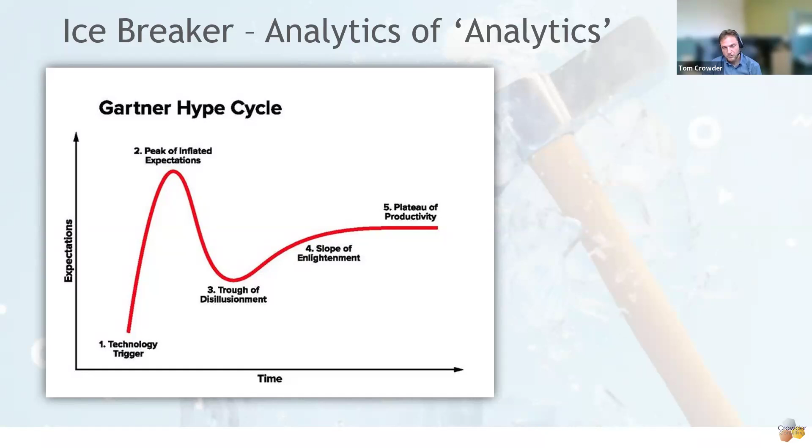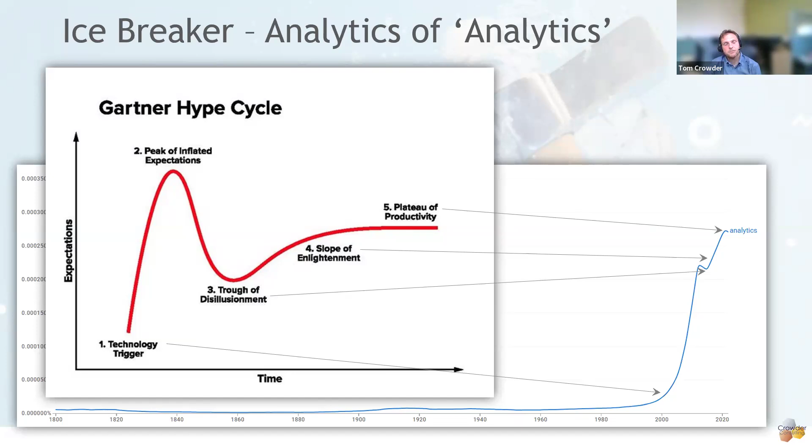So just to move on, the first section is about DMA flows and pressures. Really just to go back to what is a DMA and flow monitoring. This slide is really just showing what a DMA is.

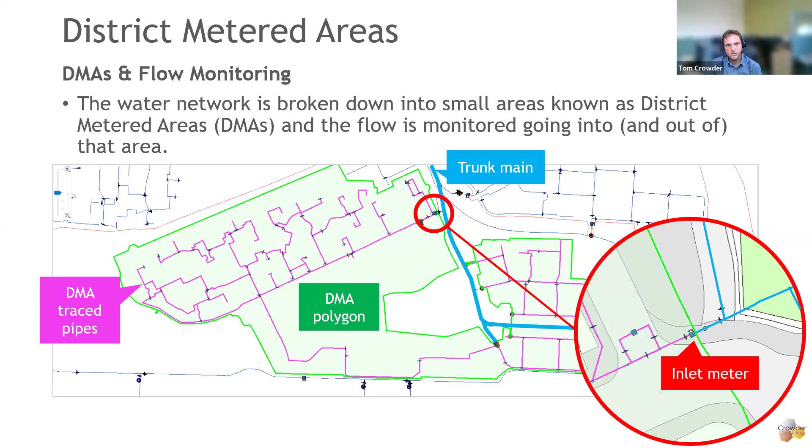The water network is broken down into small areas known as district metered areas, and the flow is monitored going into and sometimes out of that area. The net flow is the total flow for a DMA, and it's determined by subtracting the sum of the flow of all the outlets from the sum of the flow of all the inlets, which we're seeing here in green.

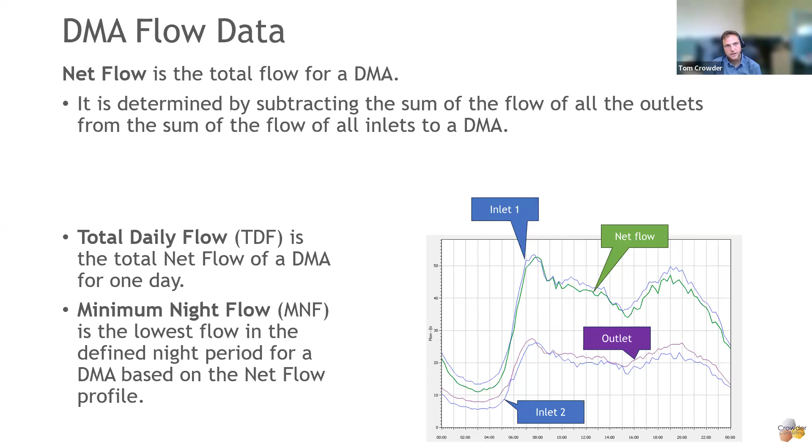And I always like the shape of the DMAs - we say it's a diurnal or predictable flow profile, and it looks a bit like your teeth. So we call it a sawtooth, like when you go to the dentist and get an X-ray.

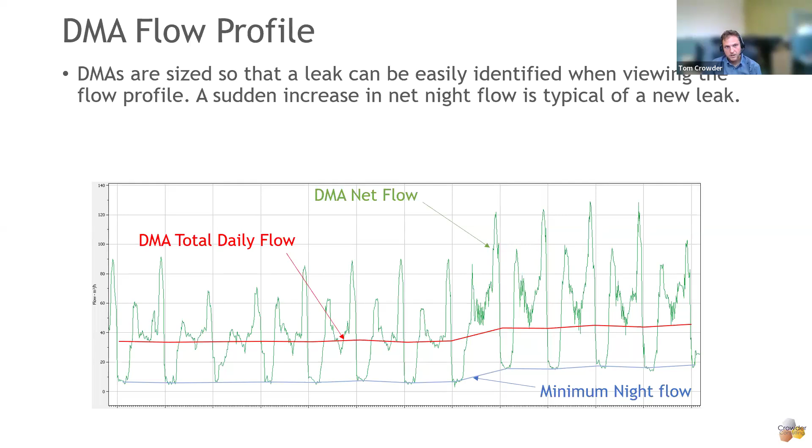When we're thinking about the minimum night flow, for leakage calculations and targeting, this is the most important period for a DMA. The reason for this is because it's the period of least consumption. In theory, for a residential area, the only consumption occurring during the night period is due to some people getting up and flushing toilets - which, yeah, I'm actually finding I'm doing more of, and I do think about that when I go to the toilet in the middle of the night. The flow measured in this period is called the minimum night flow period, also known as a DMA night line.

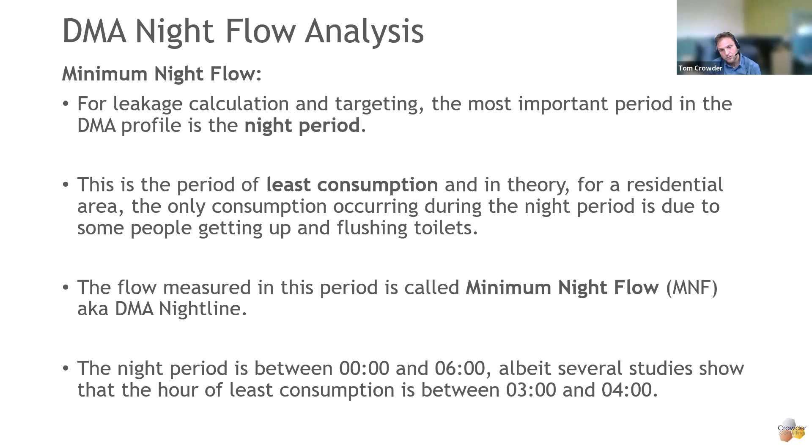We usually say that the night period is between midnight and 6, albeit several studies show that the hour of least consumption is between 3 and 4. But it obviously depends which country you live in, which region you live in.

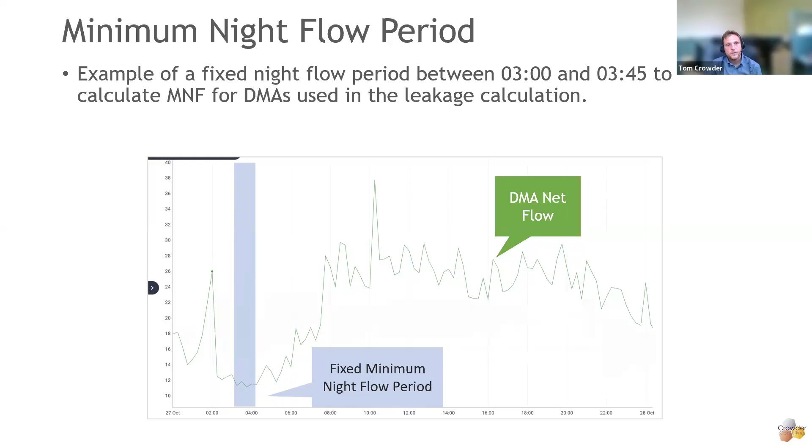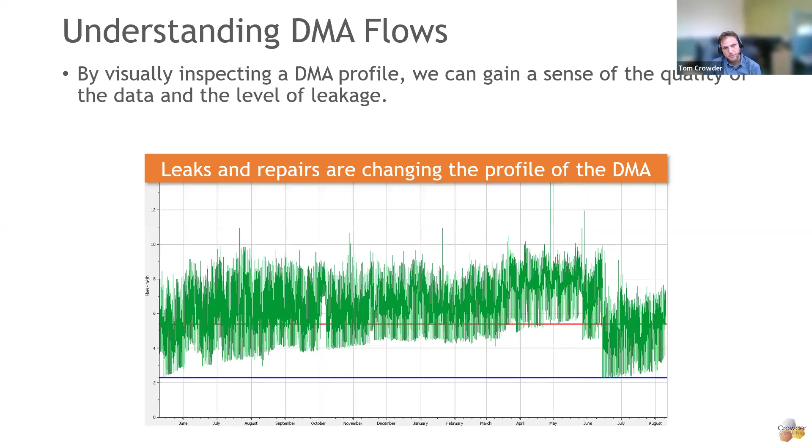When we come to understanding DMA flows, we can learn a lot just by visually inspecting them. Looking at this DMA, we can gain a sense of the quality of data and the level of leakage. We can see that leaks and repairs are changing its profile. Some leaks break out and are quickly repaired, which we'd refer to as reactive or reported leaks. And then we have some more long-standing leaks that have caused the DMA to go up, and they've been found over time after investigation.

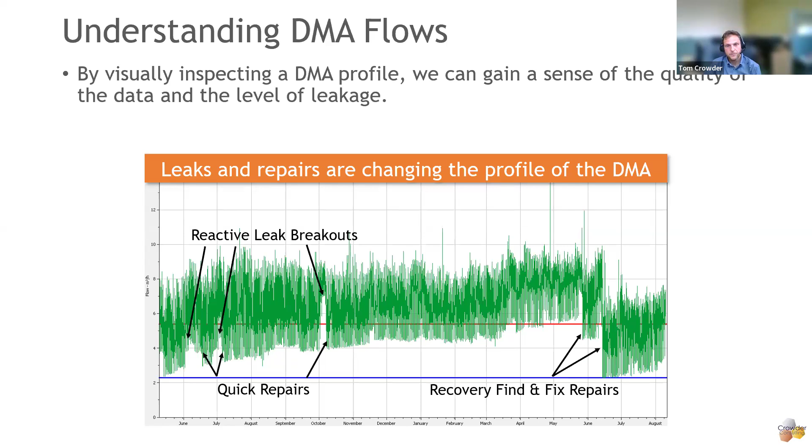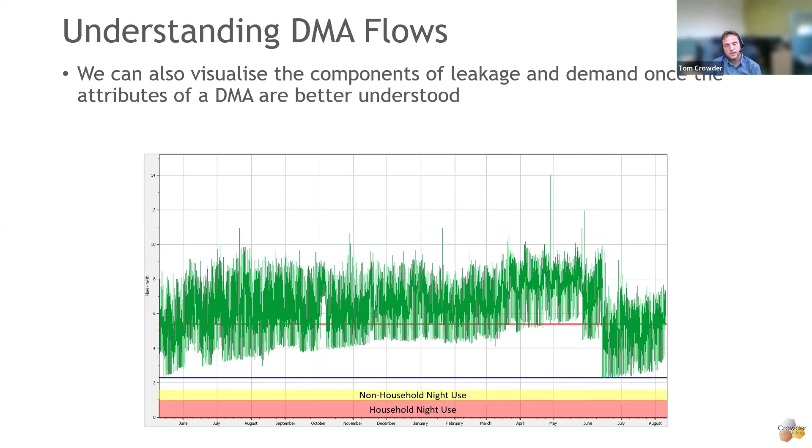We can also visualize the components of leakage and demand once the attributes of a DMA are better understood. If we understand the night use for households and non-households and the background leakage, we can then understand how much reported burst leakage and unreported burst leakage we've got. So it's important when looking at a DMA graph to try to visualize that it has several components that it's made up of.

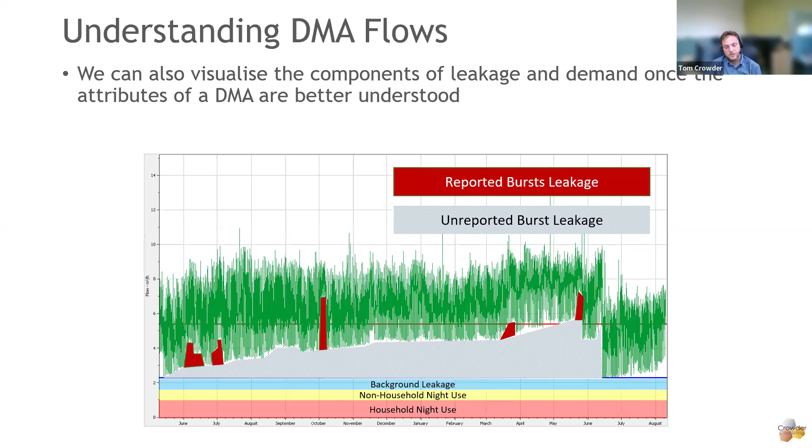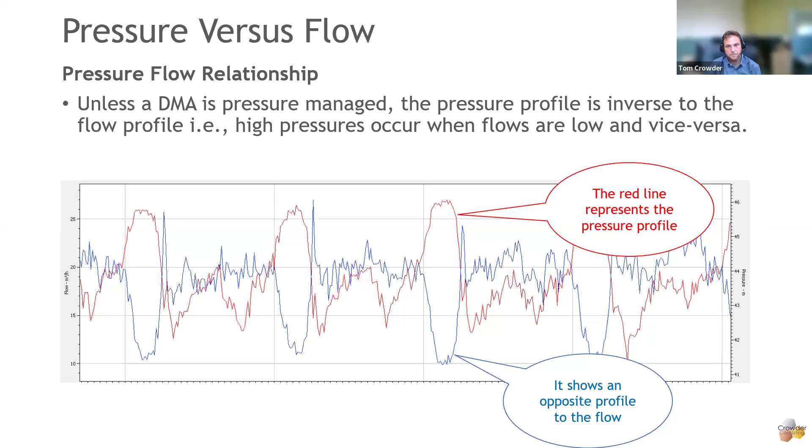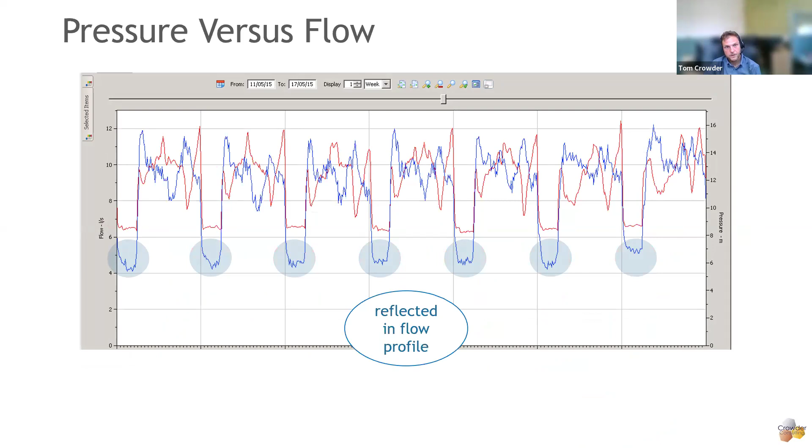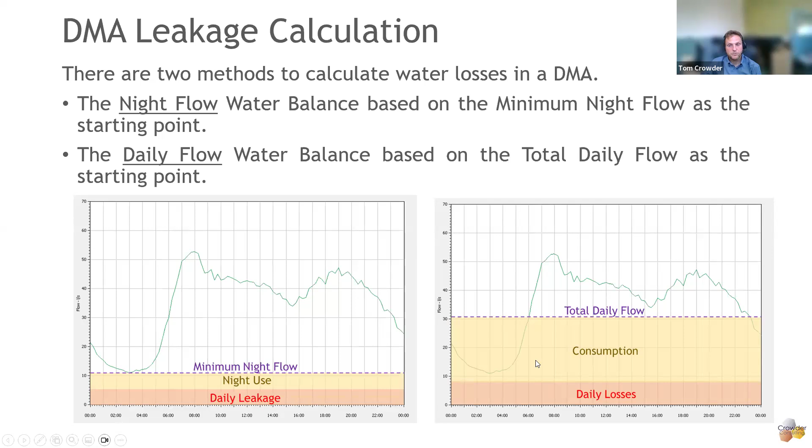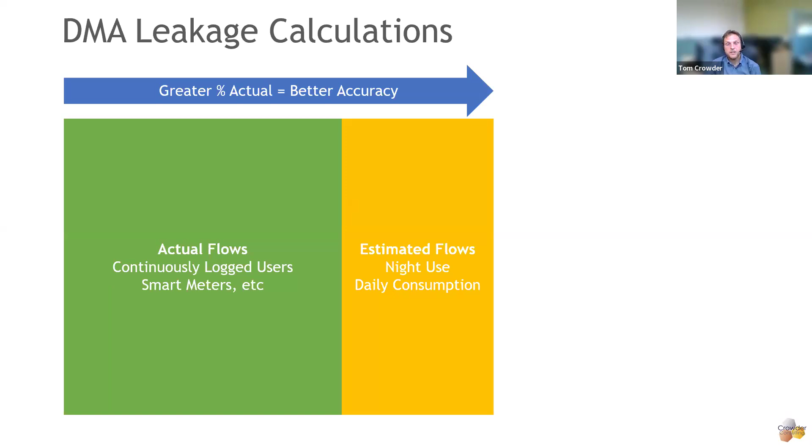So the more this green box goes to the right, the more accurate our leakage calculation will be. Similarly, with the orange box on the right, the greater that percent is measured, the higher confidence we have. So the more of your flow that is measured will increase your confidence. But that is caveated by whether you've got a good night use model and how frequently you read your meters.

Here in the UK, for measured households, for example, we may only read the meters every 6 months. So when you're trying to work out the flow consumption for a household for an individual day, and you've only got readings every 6 months, it's quite difficult to do. But the more frequent your readings, the more you can predict your daily consumption and then what your night use would be.

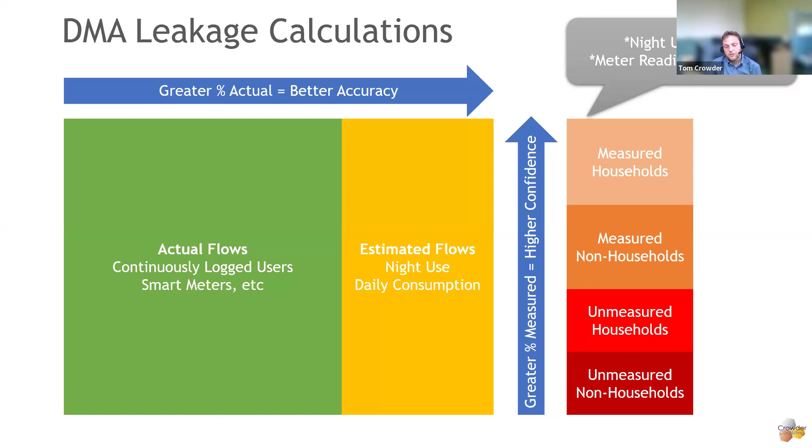So when we get into the night flow water balance, we use it to calculate leakage in DMAs with a valid minimum night flow and reliable night use allowances. You've really got to have those two things as a starting point.

When we do the calculation, night leakage is derived by subtracting your actual night flow—your continuously logged night flow, any smart metered night flow—and your estimated night use, so your household night use, non-household night use, and any miscellaneous night use. What you're left with is your night flow leakage, which you multiply by a night-day factor.

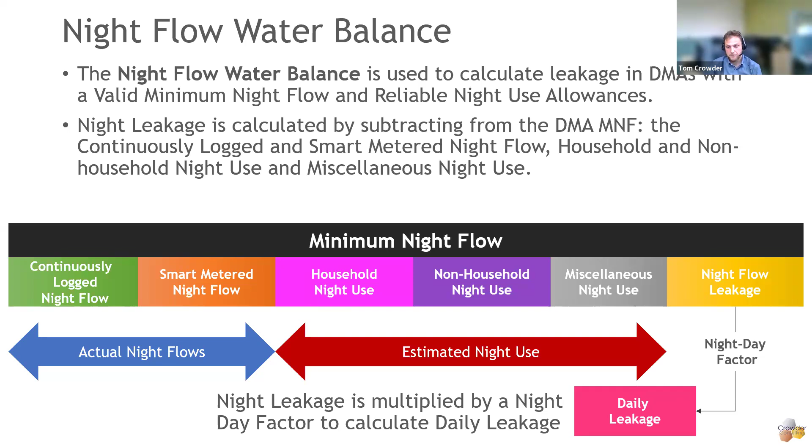To give you your daily leakage for a DMA. When we think about the night-day factor and the AZP and pressure and leakage, we've got a little diagram to illustrate. Imagine this is a topographical diagram of a DMA. We've got our inlet meter, our critical pressure point, our average zone point, and a boundary valve. We've got our flow measurement and our pressure at our AZP.

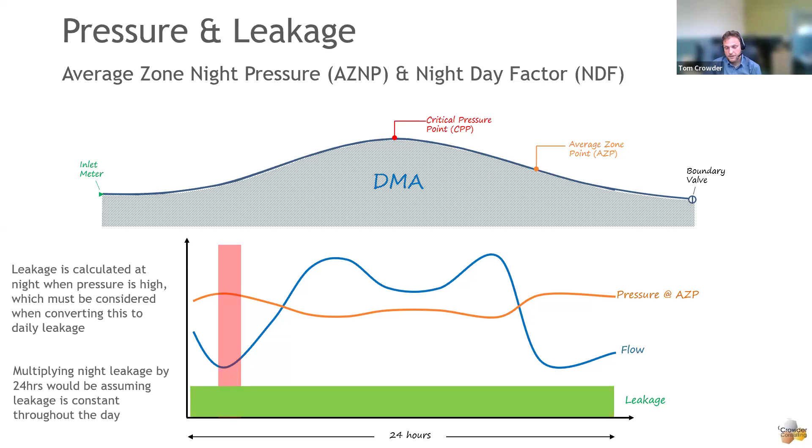We know that our leakage will vary throughout the day according to the pressure. If we're calculating our leakage at night when pressure is high, unless it's pressure managed, we must consider this when converting the night leakage to daily leakage. If we just multiply by 24 hours, we would be assuming that leakage is constant throughout the day. So we have to adjust the leakage by a night-day factor, which uses the ratio between night pressure and average daily pressure to adjust the leakage, as illustrated here.

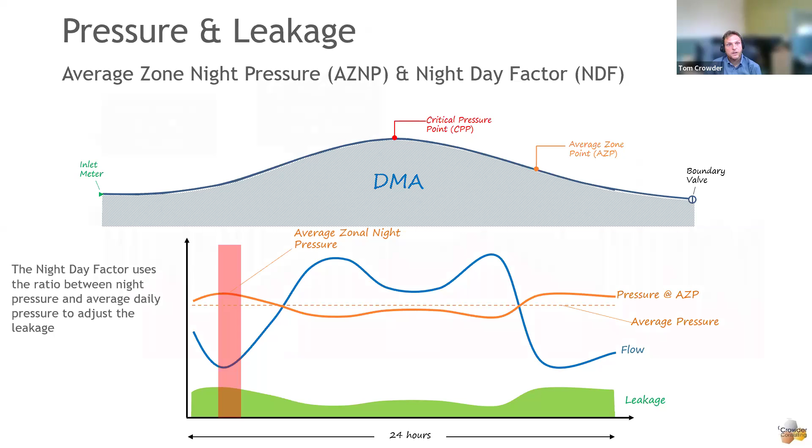Now, when it comes to trending leakage, this is showing a night flow trend for a DMA, and we can see the flow rate in litres per second. We've plotted 52 weeks in this trend of the night flow for a DMA, and we can see the different components of the night flow over time.

In the chart, we've got our leakage, which is the biggest bit in this DMA, the red bit. We've got our night use, our continuously logged flow, and then the line along the top is our minimum night flow. These are weekly trends.

Just looking at that trend, because this is the UK and we were talking about the weather before, we always have a cold period in the UK. You can see how this cold period is influencing the leakage, making it go up. And we also have a warm period, which also bizarrely always makes the leakage go up.

This is a common argument here: is it really leakage, or is it demand? And it is both. I think leakage goes up because of demand and we're not accounting for it properly. But also, when we do have extended periods of hot weather, it does actually cause more breakouts on our networks as well. So it's just interesting to see those trends of leakage over time.

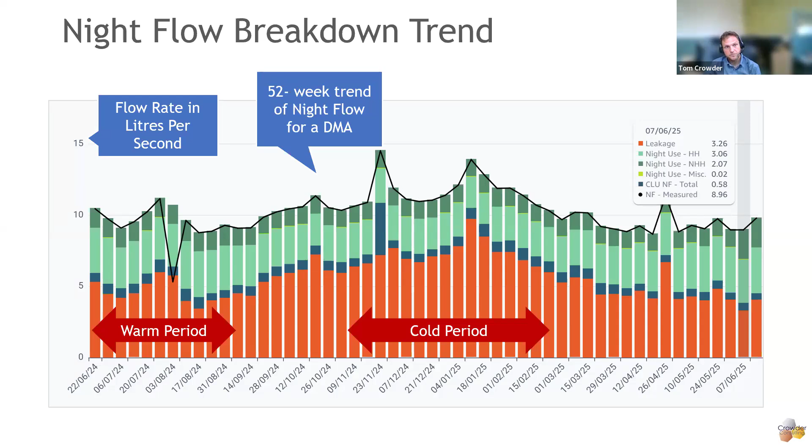When we look at the daily leakage trend for that same DMA over that same time period, we can see the flow rate in megalitres per day. We've got the trend of leakage. What is good to do is look at rolling trends, where you're not just looking at a fixed value each week, but looking back over a longer period to see if your leakage is generally trending up, trending down, or staying about the right level.

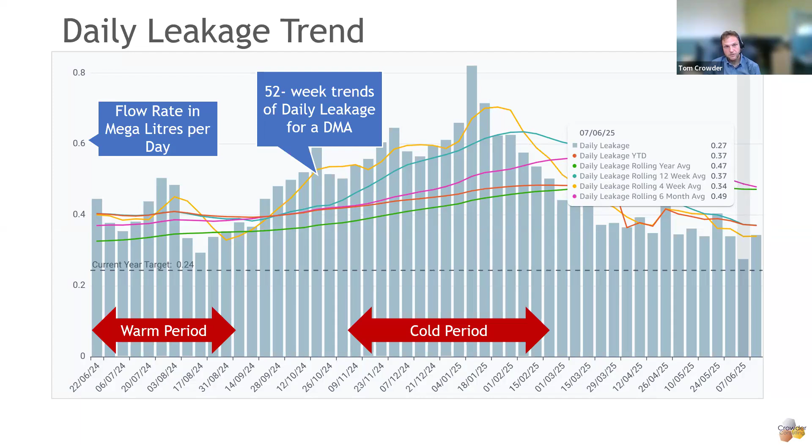Again, we can see that same cold period where leakage jumps up. Usually in the UK, that's panic—that's when they press the red button and everyone really gets onto it to resolve the leakage. And then we can see that same warm period where leakage has gone up too. So they're just some simple trends of leakage that we can do over time.

The daily flow water balance can also be used to calculate leakage in DMAs. What we generally say is you would use a daily flow water balance where you've got an irregular minimum night flow or unreliable night use allowances.

Similar to the night flow water balance, you've got your actual daily flows that you're subtracting from your total daily flow—so continuously logged and smart metered. And then you've also got your estimated daily consumptions. I say estimated, it could be all measured, but on any given day, if you haven't got readings for that particular day, there's always some level of estimation in terms of what the consumption is. And then the difference we have is daily losses.

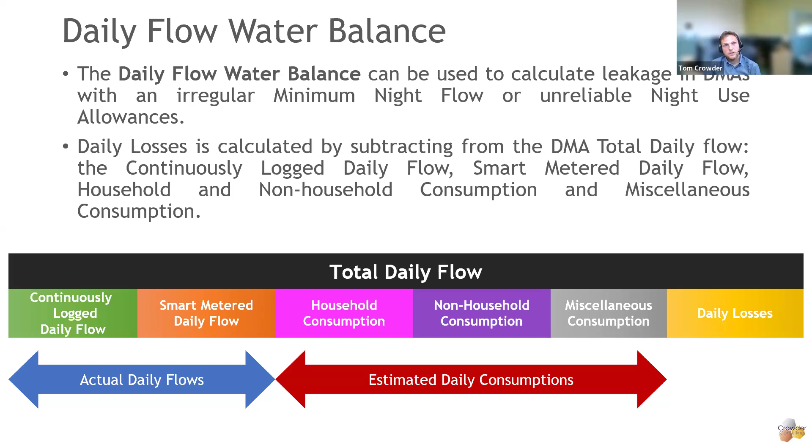Now, what we can do with that calculation is compare what we're getting from the daily flow water balance with what we're getting from the night flow water balance, and compare those two values of leakage. This is considered good practice because it can help identify potential data issues or integrity concerns within your DMA. We call this difference a residual difference.

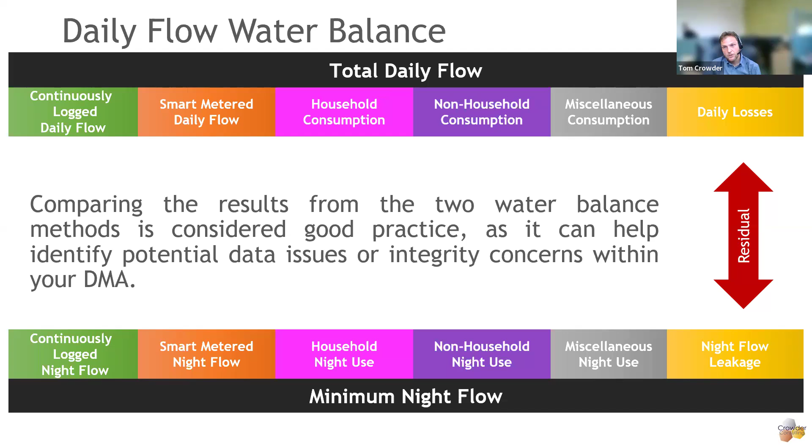It also, if we swap some terminologies around, can tell you how much potential apparent losses you've got, if you're confident in both sets of calculations—one is more equivalent to your non-revenue water and one is more equivalent to your real losses. It gives you some valuable insight as to the level of real and apparent losses within a DMA.

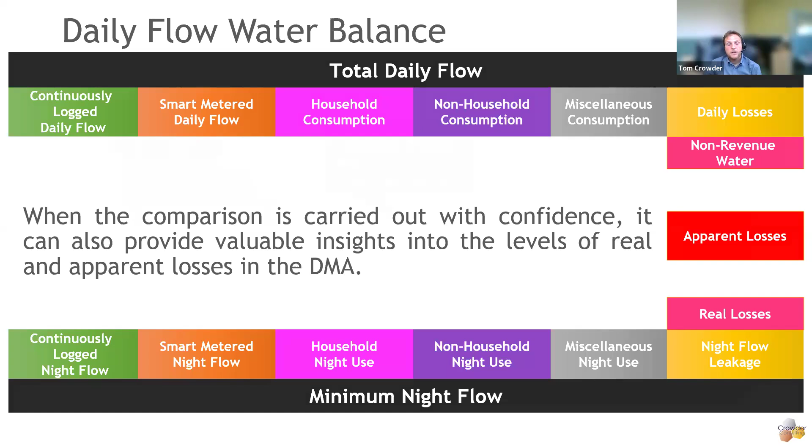Next, I'm going to talk about the DMA mass balance. When we think about the mass balance, this is where we're putting the net flow alongside the components of demand, including consumption and leakage. When we're thinking about the residual, here the residual is the difference between the DMA net flow and demand, but we're looking at the residual as a 15-minute profile rather than a daily or weekly trend.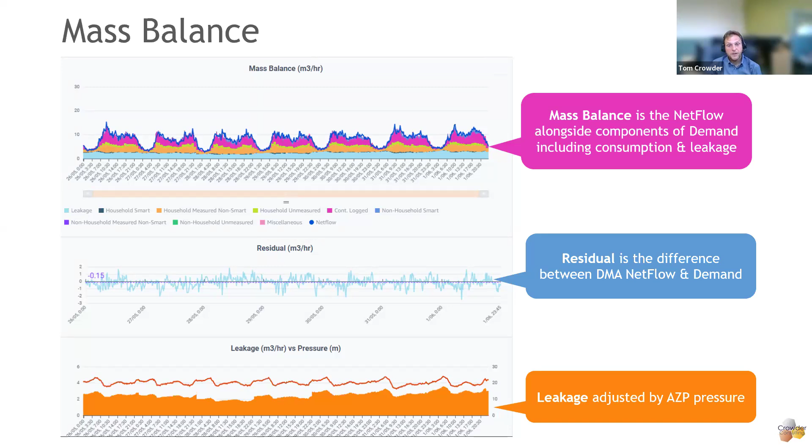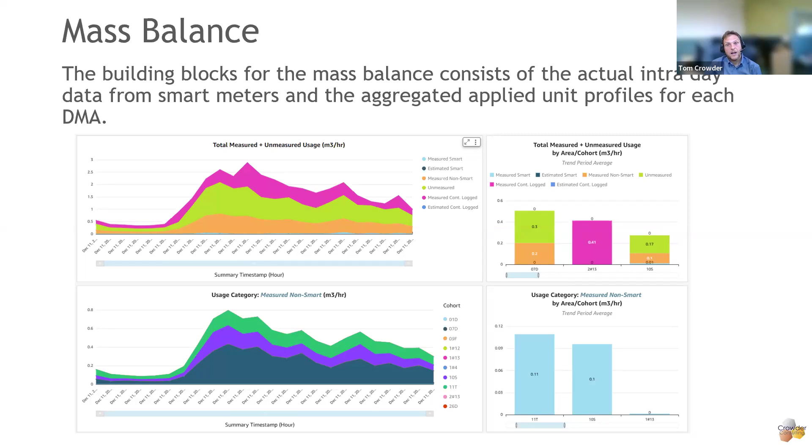So the building blocks for the mass balance consist of the actual intraday data from smart meters and the aggregated applied unit profiles for each DMA. In other words, we've got our smart meter data, which we know, and we can use that. But then we use that smart meter data to adjust the data that isn't smart metered to make it more accurate. The way we do that is we generate profiles from the smart meters, and then apply them to the consumption of each non-smart property.

So we're looking at a household as an example. This could be a profile for a particular type of household generated on any given day from the smart meters. What you'll see is that when you average this profile out, it will equal 1. Then we apply that profile to individual households, to their individual consumptions, and that's how we can get a profile of what a household that isn't smart metered could look like.

It's the same type of analysis that we do for non-households, where we have a profile for groups of non-households - for example, agriculture, or hospitals, or other groups. The average will always be 1, and then we apply that unit profile to the individual non-households that aren't smart metered to get an idea of what they may be using throughout the day.

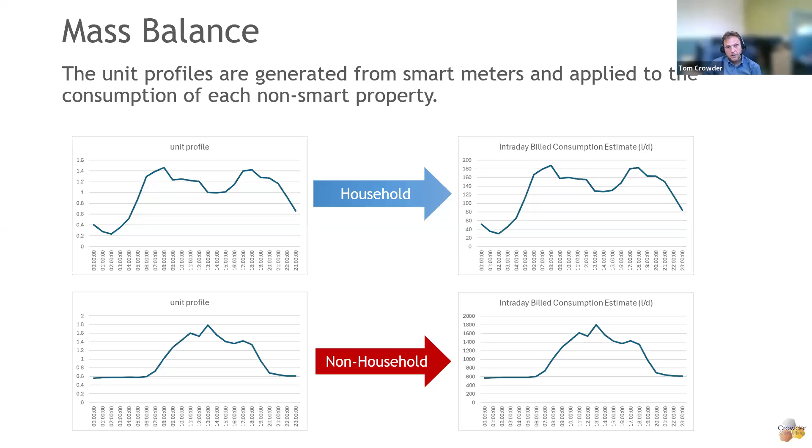When we get to leakage, we still calculate leakage in the night period using a similar type of calculation to what I was showing, but we adjust the leakage by the AZP profile. This is where we use the average leakage and the average pressure at 3 and 4 a.m., multiplied by the average zone pressure at any given time. This is really just giving you an example of how you do that.

What we end up with then is when we're looking at a single day, the leakage will follow the trend of the pressure. When we're looking at a 7-day view, we can also see how the leakage trends against the pressure. So it just brings the leakage more to life when we're looking at it for a particular DMA.

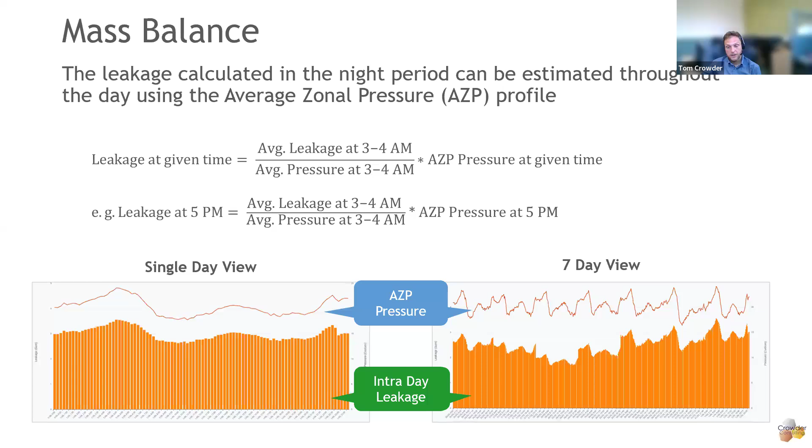This is an example of a DMA with almost full smart meter coverage - it's got 93.64% smart meter coverage. What we can see is if we look at this top section here, there's a bit of a gap, and that gap is reflected here in this residual profile.

This shape and this magnitude tells us something a bit more about what might be happening in the DMA. It indicates that we are missing some consumption potentially in this DMA, because it's quite a regular shape and it's usually always positive. So it helps to investigate specific issues within the DMA. And then we can see our leakage there against the pressure, which is a little bit up and down as well. So it's just to give you a bit of insight about the mass balance and how it can be used in bringing leakage to life, as it were.

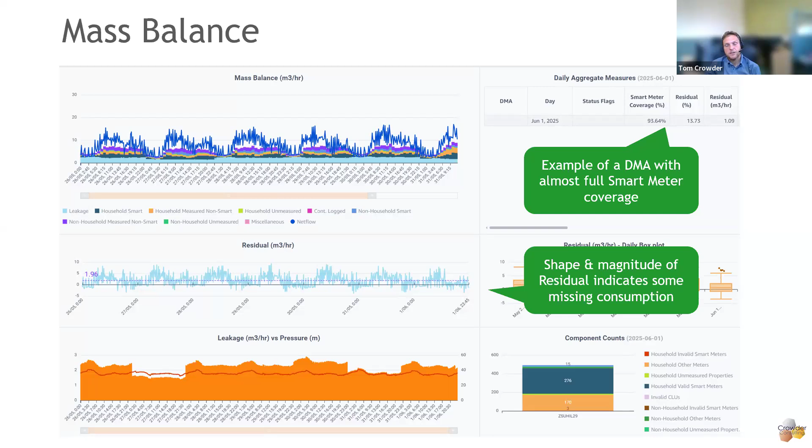So next is a case study.

This case study is based on work we were doing with Northumbrian Water in Berwick upon Tweed, which is the northernmost town in England. It's almost in Scotland, you can see Edinburgh there, and there's Berwick. For football fans, it's the only English team to play in the Scottish League.

Berwick is an independent water resource zone in Northumbrian Water, meaning this area doesn't have any links with other areas. It's got its own water treatment works that supply it, with no transfers in or out. Some would say that's good, but it's kind of bad because it makes the water resource zone less resilient and more susceptible when there are high levels of demand, like during a heat wave, when up north we go a bit mad filling things in our gardens and use a lot of water.

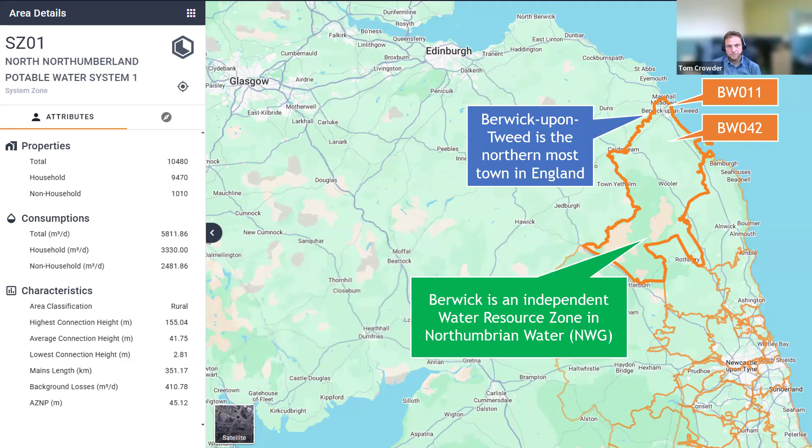Reducing leakage in the Berwick zone to the target level was a key water resource management objective for Northumbrian Water, and it was successfully achieved in March 2025.

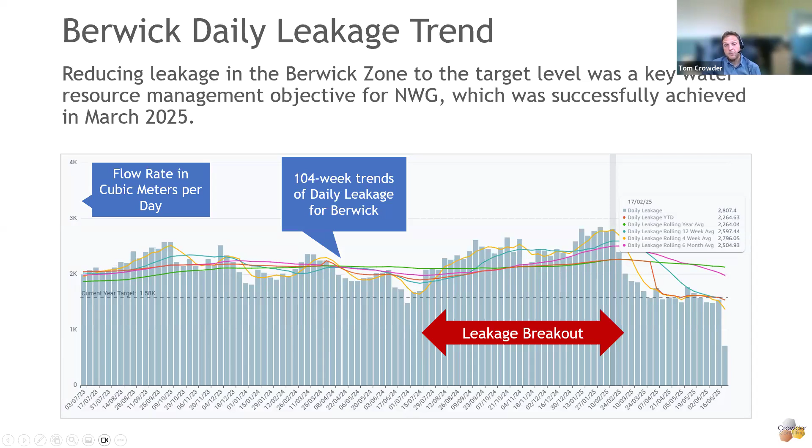This trend shows the leakage for the entire zone in cubic meters per day, trended over 104 weeks, essentially 2 years, so you can see how leakage is changing over time. In 2024, there was a particular issue with a leakage breakout, which was a big headache for Northumbrian Water to solve.

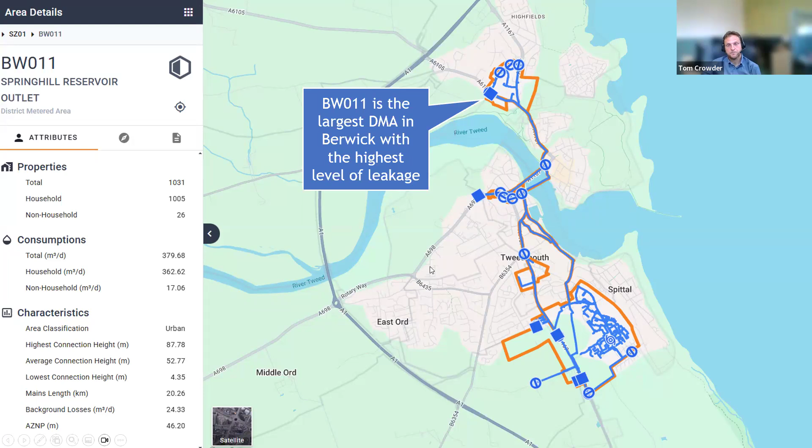Reducing leakage in BW011 was critical to meeting the zone's overall leakage target, as it accounted for 32% of total losses. You can see again the flow rate in cubic meters per day.

Looking at the flows and pressures for BW011, it's a bit of a nasty DMA. It had 1 inlet meter and 6 outlet meters, but its net flow lacked a typical diurnal pattern. Here we've got the inlet flow, which is nice, and the AZP pressure, which is doing the opposite of the inlet flow. But the net flow is a bit up and down, and doesn't have that nice diurnal pattern you would expect.

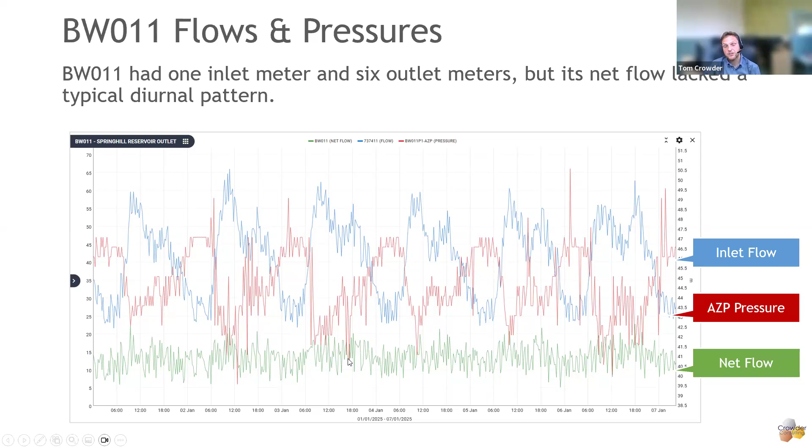We wanted to understand that a bit more, so we installed an ultrasonic meter in line with the inlet meter. What we found is that while the daily average flow remained largely unchanged, variations were observed at 15-minute intervals, particularly during the night flow period. You can see these little spikes during the night, and that's obviously affecting our leakage calculation. But overall, the difference up and down wasn't that far off as an average flow, just these individual 15-minute periods.

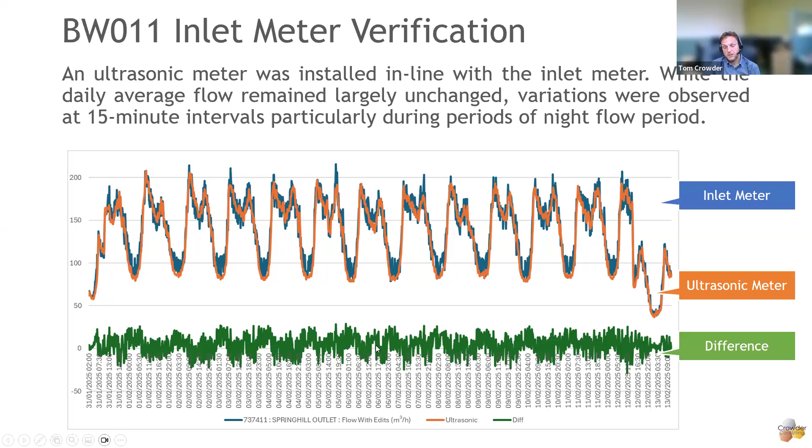Although the inlet meter had known issues, we still remained confident that the DMA was experiencing significant leakage based on historical trends and the daily flow water balance. We estimated the leakage to be in the region of 7.5 litres per second, or 0.65 megalitres per day.

As mentioned, the DMA proved challenging to survey, and Northumbrian Water had already employed both conventional and innovative techniques, but hadn't got to the bottom of the leakage. So therefore, in collaboration with Northumbrian Water, we recognised a need for a different approach.

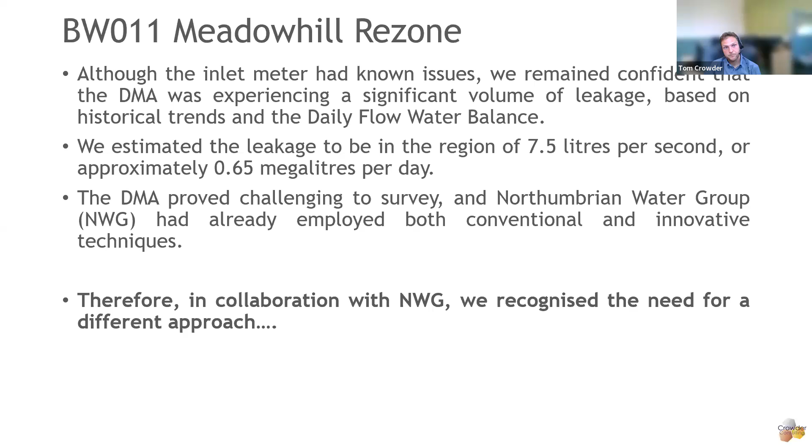What we devised was to rezone this DMA, BW011. We were going to feed the north section from another DMA, and then feed the south section too from another DMA, and just leave what we felt were the nasty bits of this DMA, the trunk main system. That would essentially be about 5 kilometres of mains and 188 properties.

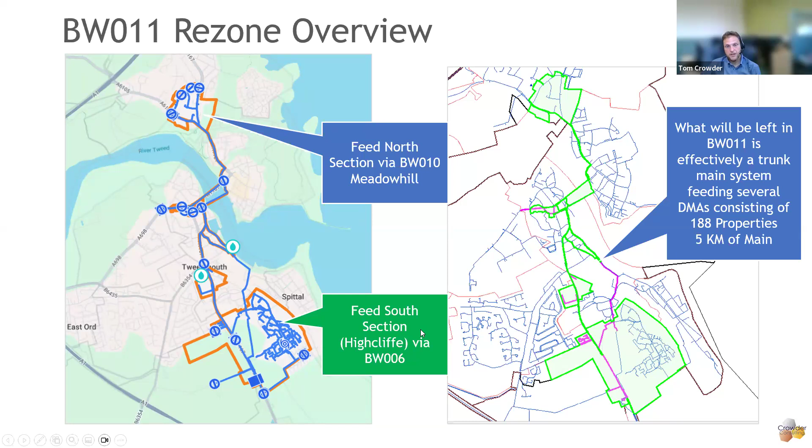So the first bit that I'm going to go through is this green bit here, which is the rezone of the south section.

When we devised this rezone, we wanted it to be a permanent rezone because we wanted to increase the size of BW006, which was a small DMA, and make the most use of its inlet meter, which looked good and reliable, to feed the area in BW011 that had the most properties, Highcliffe. So you can see we want to feed this section here from BW006. We'd also end up feeding another DMA from BW006, and that's what BW006 is currently.

And then we devised a series of steps to do that rezone, which was carried out during the night.

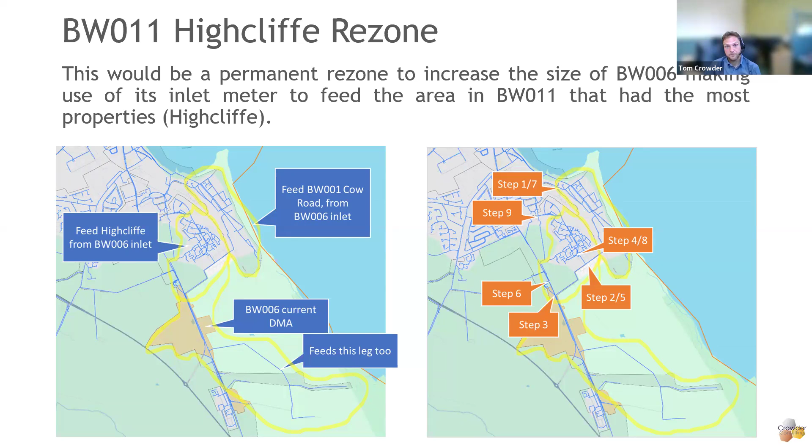In terms of BW006, the reason why we picked it was because we felt that this meter wasn't getting the best use anyway. It's only feeding 39 properties, but it's a 150 millimetre pipe, the same size pipe as what is feeding BW011. So also, this meter is located very close to the other meter, and it's quite a simple thing to do to swap them around.

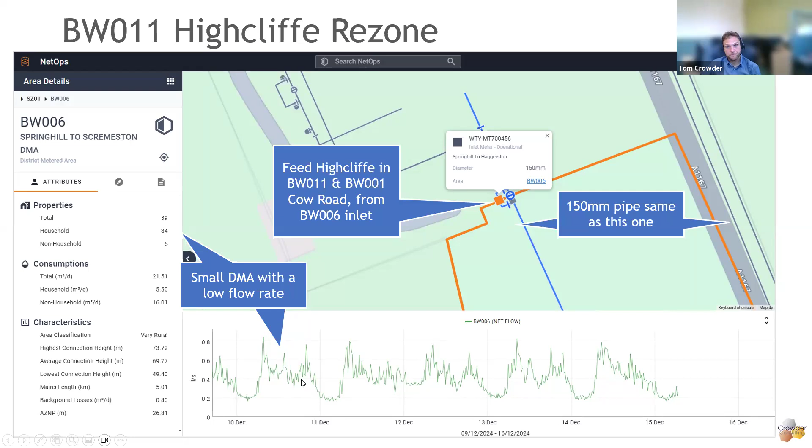So we can see what the flows were there, quite a low flow rate. And then this is what happened after the rezone.

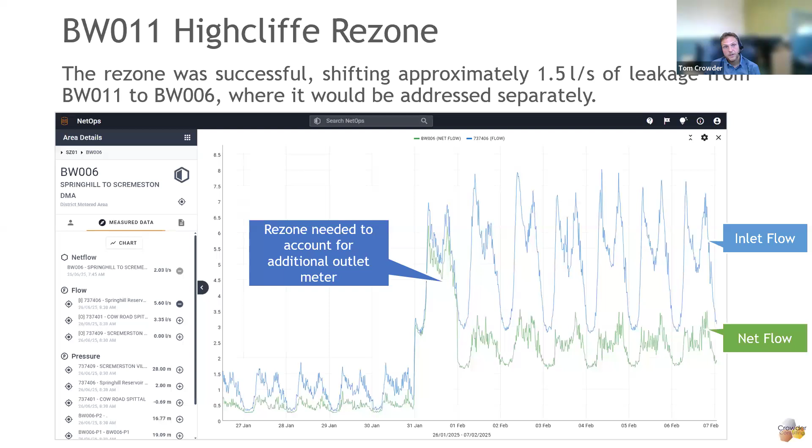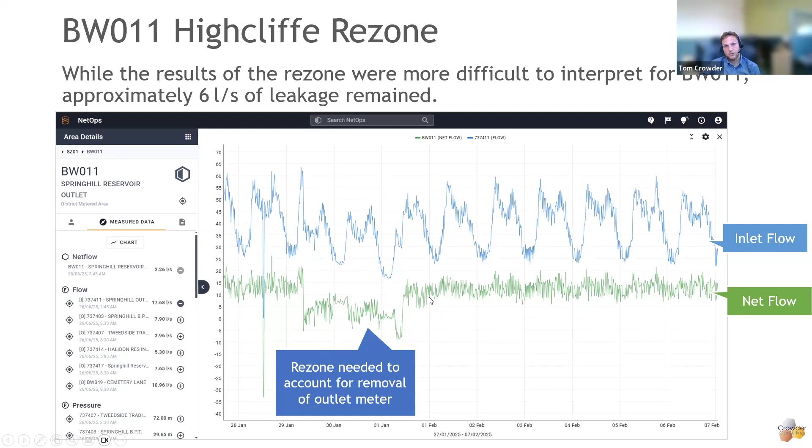So we were happy with that. We left it in place, monitored it carefully, and it's all stood up. It's worth noting that before we did any of this rezone, there was already a model of the network that the network analyst ran, checked everything, made sure it all stood up to scrutiny. And then afterwards, obviously checking the turbidity, checking the pressures, and all stood up nicely.

So the next thing that we wanted to do was what we're calling the Meadow Hill rezone. This would be a temporary rezone to increase the size of BW10 and reduce the size of BW11 to see where the leakage is.

So the plan was to feed the north section via BW10, a small section here, 162 properties, 4 kilometres of mains from there. And that's a trace of this north section.

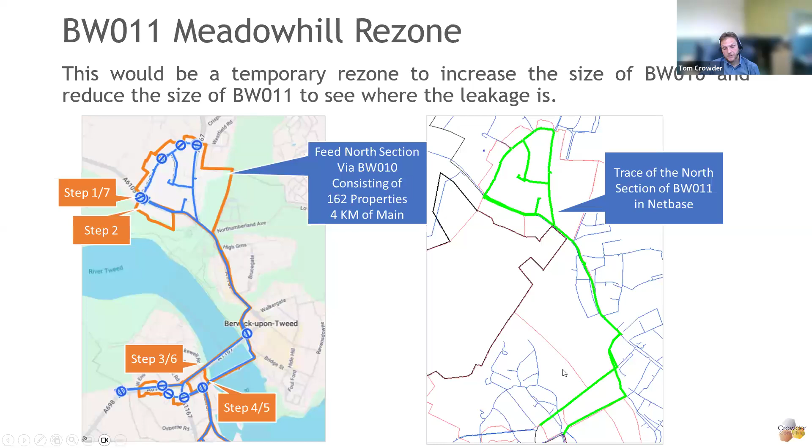Now, to cut a long story short, there was no leakage in this north section. So then we had to do several iterations of making the area that BW10 fed bigger and bigger and bigger to pinpoint the location of the leakage, which was all in one small area.

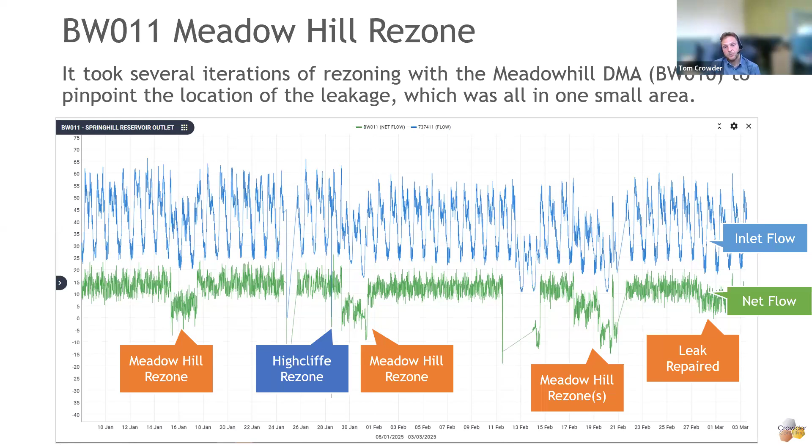So what you can see here is where we're doing Meadow Hill rezones, here, here, and here, and then where the leak was repaired. It's quite difficult to see on this, but you can see the rezones. When you look at the Meadow Hill DMA, it's a lot clearer to see the impact of the rezone, and we more use this DMA to assess the level of leakage.

And we hit the jackpot around the 21st of February. In this period here is where you'll see that jump up, which meant that in these ones we weren't feeding the leak, whereas in these ones we were feeding the leak. And then the last one, we really narrowed it down to a small area. So you can see that jump up.

Now, this wasn't all leakage. We had to take into account that Meadow Hill was feeding an additional outlet meter, so we did that analysis separately.

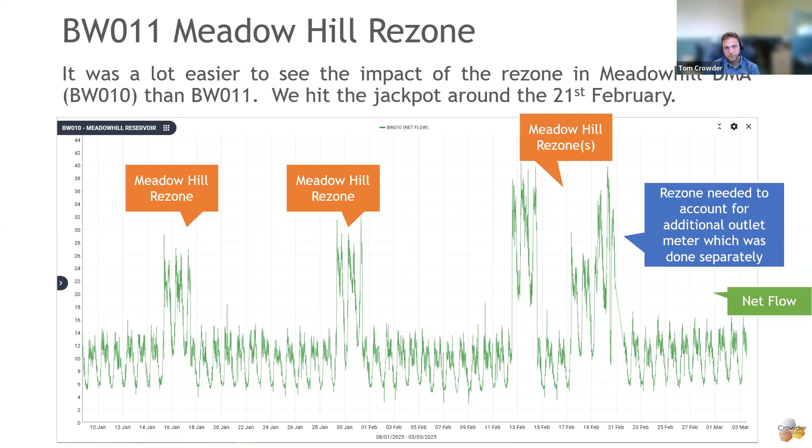So this is really just a summary of the iterations that we did to hunt down the leakage. And all the rezones were carried out by Northumbrian Water, their team. They did all the rezones, because they know the network and they wanted to solve the leakage as well.

We did several iterations. In the first one, it was just the red bit. Then it was the red plus the yellow plus the green. Then it was just the red and the yellow, and that's where we got the first bump up. Then we narrowed it down to this section here, the red plus the yellow, excluding this circle area. And we knew then that 6.5 litres per second was in this section.

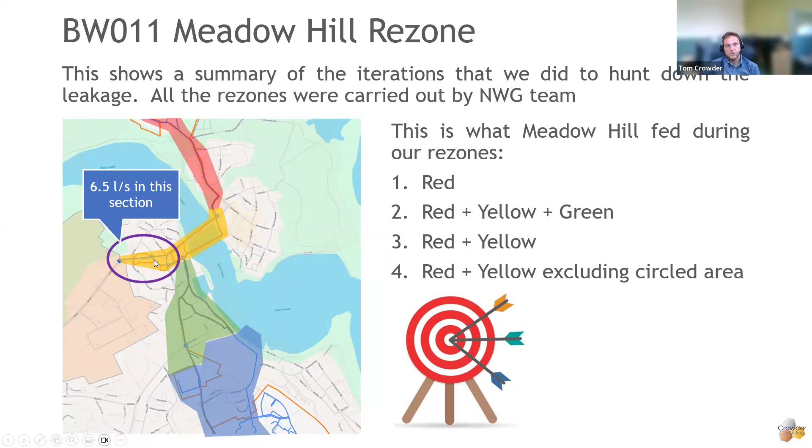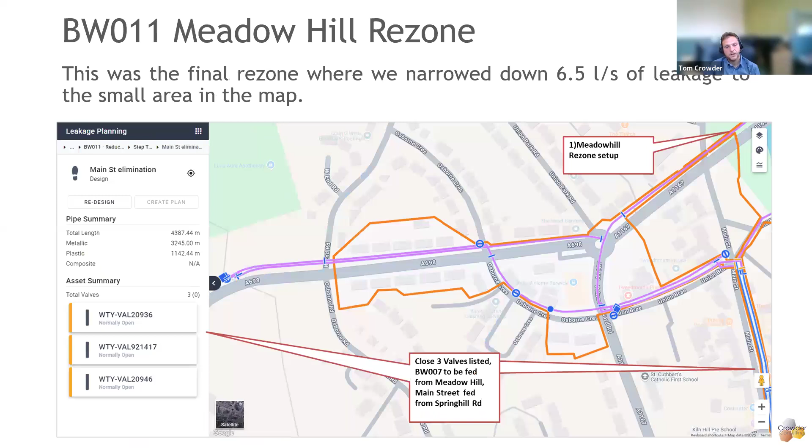And this was the final rezone where we narrowed down the 6.5 litres per second to the small area on the map. We had to close 3 valves and resupply it. And we then went out at night. Once we knew it was in this section, we went out at night to correlate it and pinpoint it.

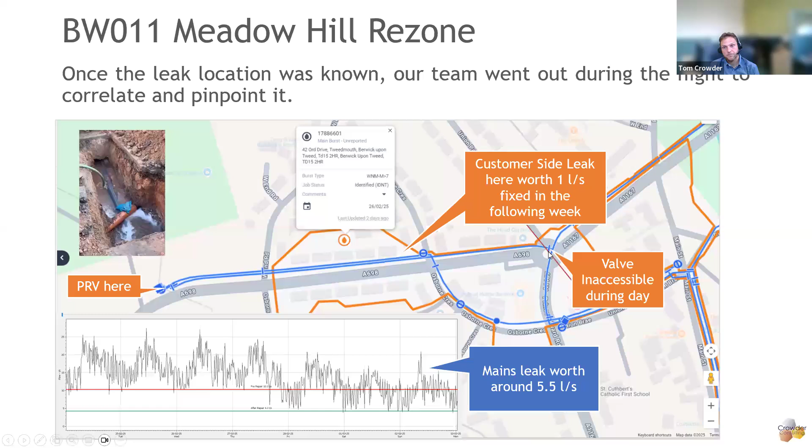So just to get to a summary, the importance of analytics and prioritizing NRW action. Hopefully I've shown why it's important to understand flow and pressure, and how analyzing flow and pressures helps you gain a deeper insight into your DMAs. And then how you can do a water balance assessment using night flow and daily flow analysis to evaluate the overall water balance for a DMA.

We've looked at some more advanced analytics where you can leverage smart meter data and mass balance techniques for more precise analysis. And then we've looked at a case study where you're combining the data analysis with targeted field investigations to localize leakage within the DMA. That's it, finish.

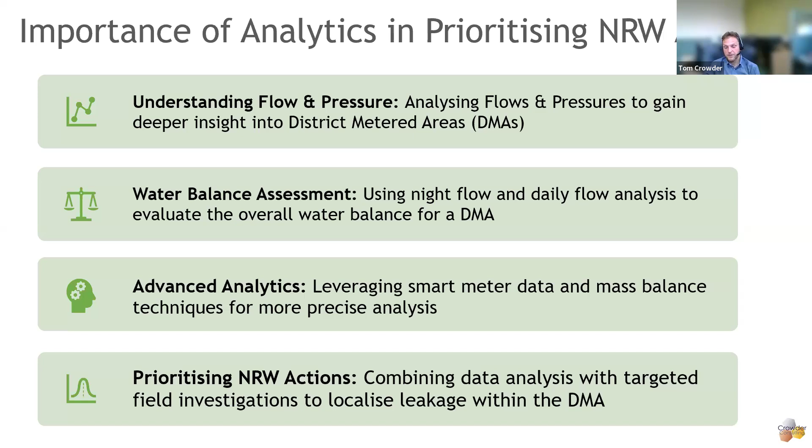Thank you. Any questions? Thank you very much, Tom. Very, very interesting. I suppose there's going to be a lot of utilities embarking on their smart metering programs that would find that quite interesting, because they're going to have to start analyzing all of their DMAs in a similar way, I would guess.